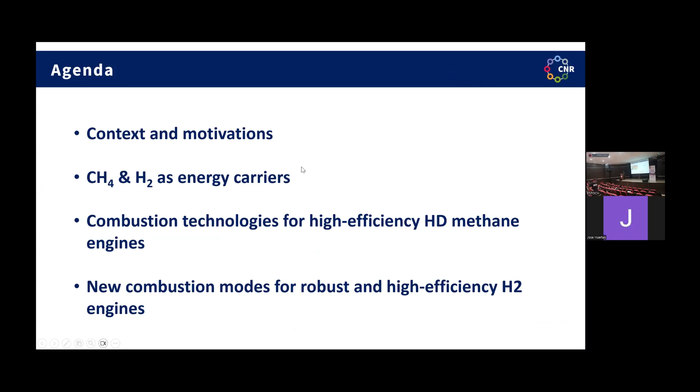This slide is already well known from all the audience, because we need to move in the energy transition to reduce the greenhouse gas emission, and we need to switch from an economy based on use of fossil fuel to a renewable and circular economy in which the energy is totally renewable.

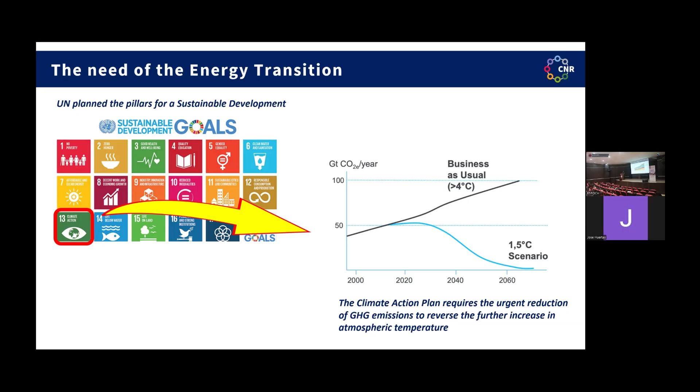In this process, we can see this slide is relative to the Europe situation, but is similar for other countries, that the transport sector accounts for about 20% of greenhouse emission with respect to the total. So this is a not negligible sector in terms of contribution, and that requires attention in improved technology for the energy transition.

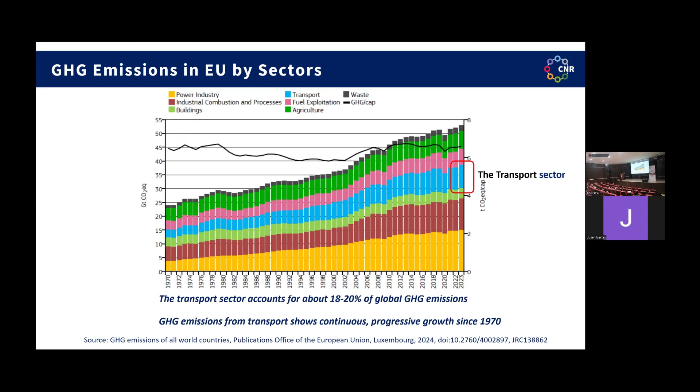Looking to the transport sector, here there is a breakdown of the contribution of different sectors, and you can see that road transportation represents the most important part of the total greenhouse gas emission, in which 60% are for the car, about 27% for heavy-duty truck, and 11% for light-duty vehicle.

But while for cars we are looking to a moderate transition, at least in Europe, toward electrification, battery vehicle, and so on, in the case of heavy-duty truck and light-duty truck, most of the market still remains on diesel and part on natural gas.

Both are fossil sources. But Dr. Chiara Guido already showed this information on the first day of the conference. So we need to work to improve this sector of transport, because it is a so-called hard to abate sector, and this is why, because most of the vehicles are fueled by diesel.

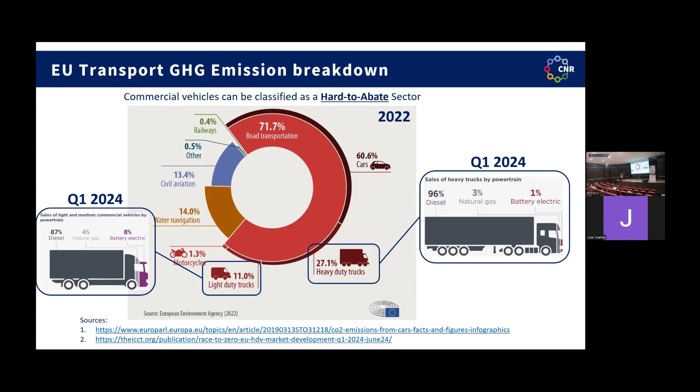What are the solutions? Here we report the conventional technologies that exist in the heavy-duty transport sector: the diesel engine, of course diesel fuel, and part of the market related to CNG and LNG gas. For both these solutions, due to the long history of technology, they have a low total cost of ownership for customer, because the engine cost is cheaper with respect to other solutions, and also the fuel is cheaper. They have a fast refilling time, and of course we know they have a very large infrastructure network for refueling.

The other solutions reported on the right: we have battery electric vehicle, hydrogen internal combustion engine, and hydrogen fuel cell. Each one has pros and cons and uncertainty for the future market.

For example, for battery electric vehicle, that is generally of interest for urban and regional transport, they have a high product cost and a medium total cost of ownership. Slow refilling time, we know the time necessary to recharge the battery, limited refill network at the moment, and limited customer acceptance, which in this sector is the main important driver.

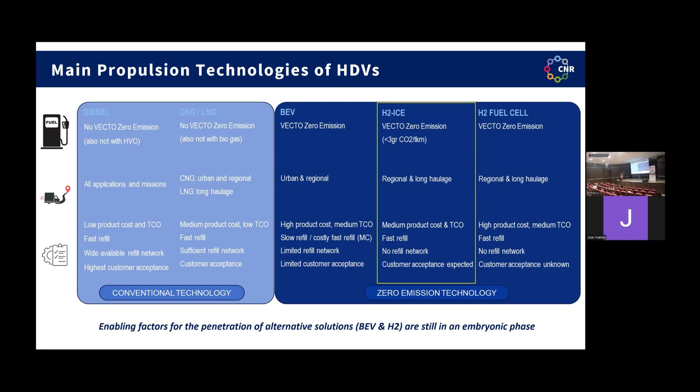For fuel cell, a similar situation. The main difference with the internal combustion engine is high production cost and medium total cost of ownership.

After a brief observation of alternative technology for heavy-duty engines, we ask why we need renewable fuel. A simple explanation is reported here.

Here is a plot of the renewable energy produced in Germany over 24 hours, daily, weekly, and seasonal. You can see there is a very large variation in renewable energy production, so to satisfy energy demand, at least for the next decades, it's necessary to have energy storage for renewable energy systems.

Either electrochemical storage or chemical storage. In this scenario, the production of green hydrogen and at the same time biomethane, so renewable methane, could be two alternative solutions, or part of the solution, to increase the consumption of renewable energy. But what is the situation about the use of hydrogen and renewable methane?

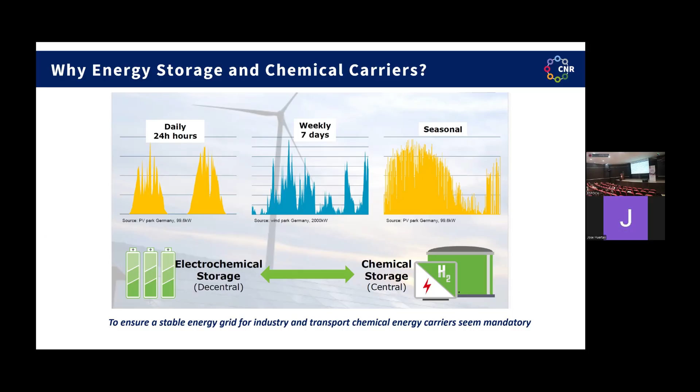About hydrogen, we already discussed the main points for hydrogen internal combustion engines and some benefits with respect to fuel cell or battery electric vehicles. It's possible to have fast refilling, competitive product cost, and at the moment in Europe they are considered zero emission vehicles, because the CO2 produced by hydrogen internal combustion engines is only from lube oil, accounting for about 3 grams per tonne-kilometer of vehicle. Below this limit, vehicles can be considered zero emission CO2.

For methane, it can also be a solution, because when you refill a methane vehicle with biomethane, the vehicle remains at competitive product cost since we already have a supply chain. There is no compromise in terms of driving range, because with LNG you can have mileage similar to diesel. Most importantly, it can use existing infrastructure. It can be mixed with fossil methane, natural gas, without any modification, so it's very fast to introduce into the network, and we already have the capillary infrastructure for distribution.

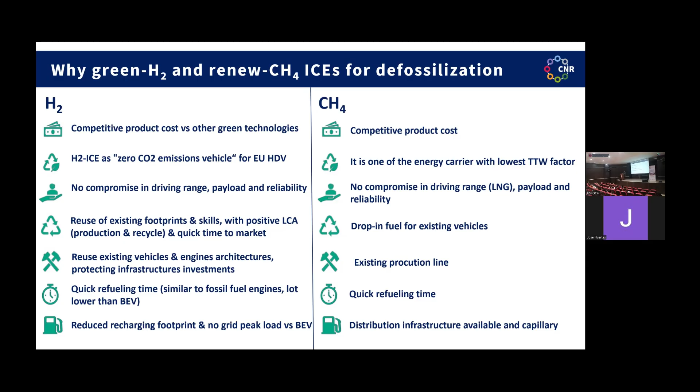This is why interest in developing internal combustion engines and methane engines is still strong, especially from the industrial sector in Europe. But what do we need to do about engines in this scenario?

The most important aspect now is to increase the efficiency of the engine, to reduce fuel consumption when the engine runs, and to reduce pollutant emissions for social acceptance of the engine, possibly to near zero level.

What does near zero mean? It can be discussed, but what I can say is that with the Euro 7 regulation level in Europe, the level of emissions in terms of NOx and PM can be demonstrated to be below the ambient pollutant produced by other sources. This is demonstrated in some cities where for ultra low emission engines, the contribution of a single vehicle to ambient conditions is quite negligible.

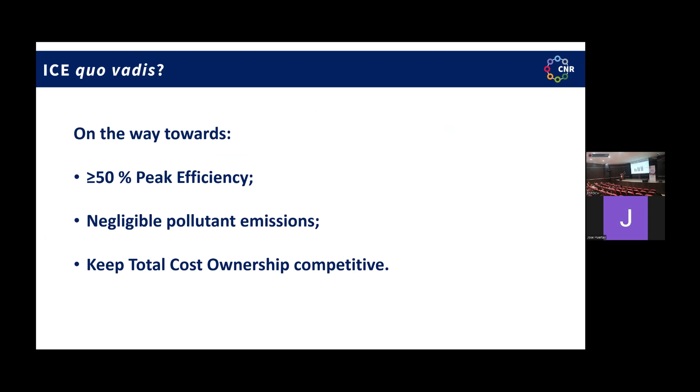provides the response to what was discussed before, regarding hydrogen and why it is the way it is, because at the moment the cost of hydrogen is very high, so it's necessary to reduce the fuel cost to be competitive with diesel.

The difference between hydrogen engine and fuel cell, and which will be successful in the market between these two technologies, will depend on fuel cost, because fuel cell has high efficiency with respect to internal combustion engine, but internal combustion engine has low cost. Depending on what the fuel cost will be, the total cost of ownership of the two vehicles changes between them, so in some cases it could be convenient to buy fuel cell, and in other cases it could be convenient to buy hydrogen internal combustion engine.

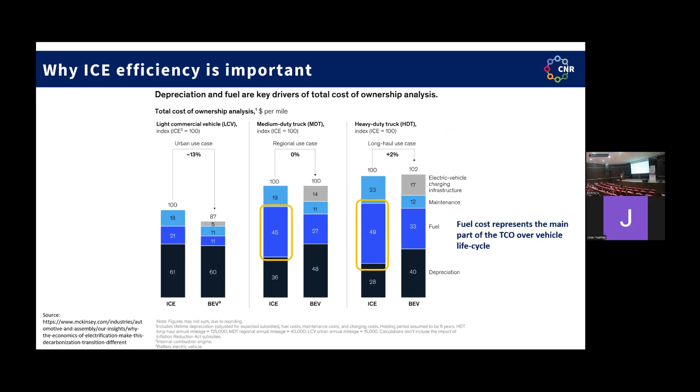This is relative to hydrogen. We are also working on improvement of engine cycle operation control, because when working with hydrogen, especially in ultra-lean conditions, cycle-to-cycle operation becomes an issue. Another important point is optimization of lubrication oil, because dedicated hydrogen use requires a change in formulation to limit the interaction between hydrogen and lube oil molecules.

Another important part is the compatibility of engine component materials with hydrogen, because that is one of the main issues using hydrogen in the engine: embrittlement. The material can reduce its properties in terms of robustness, so it's necessary to use special materials for hydrogen in the engine.

Improvement of an after-treatment system dedicated for hydrogen, and another cutting-edge combustion solution is direct injection compression ignition combustion of hydrogen. I'll show you some results about this point.

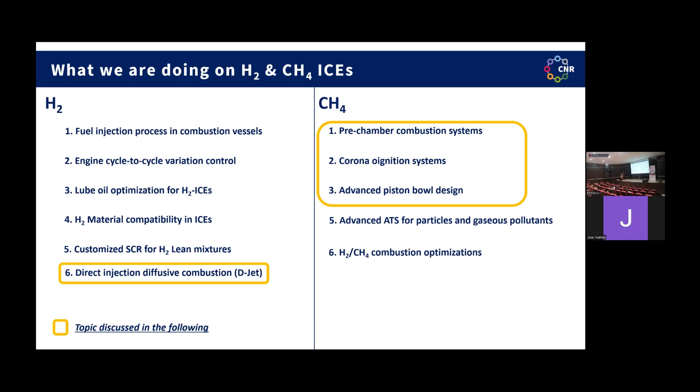A few words about this facility. This is a heavy-duty engine with 2 liters of displacement, and the particular thing is that we designed, developed, and manufactured the entire engine, of course with the support of some customers, but the whole test lab is proprietary to STEMS, our group. The reason is that we want to have a platform with total control of the hardware and software in order to test disruptive technology or new components that would be difficult to test on a complete multi-cylinder engine already prepared by a manufacturer.

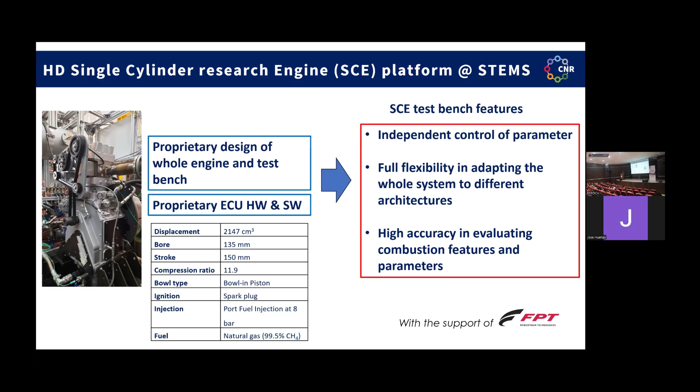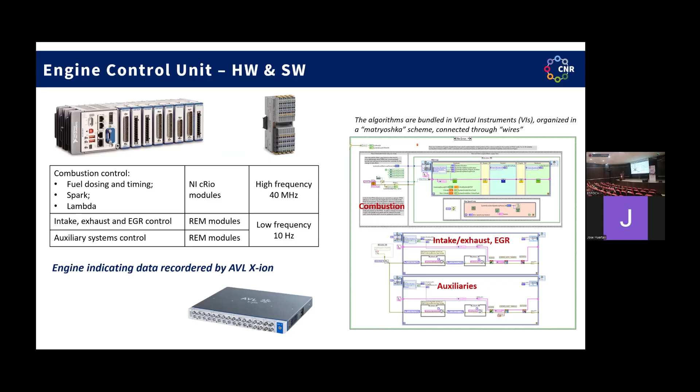Okay, some results, a spotlight on the different technologies that we are working on. The reason why we are working on this is the use of engines with dilute mixture, so leaning the combustion, because leaning the combustion, using a lean air-fuel mixture, increases the efficiency.

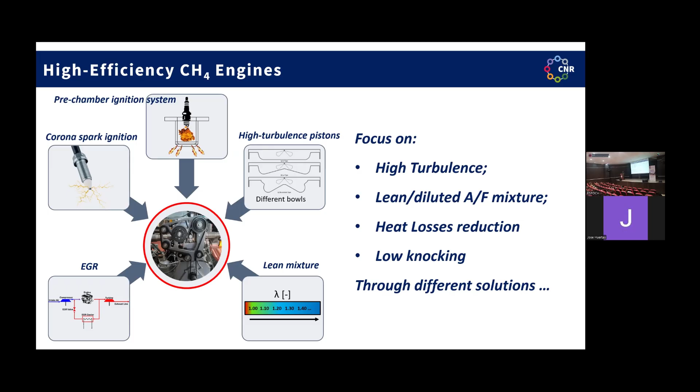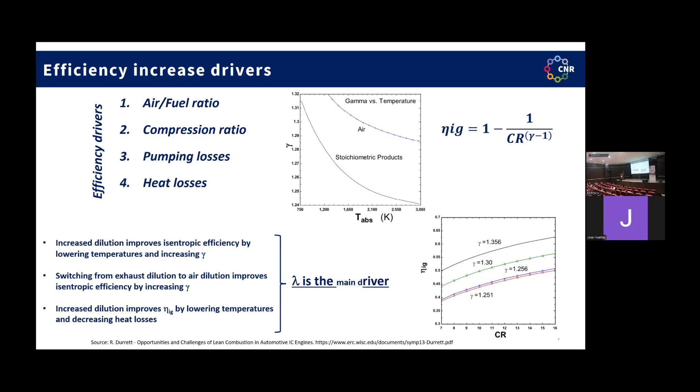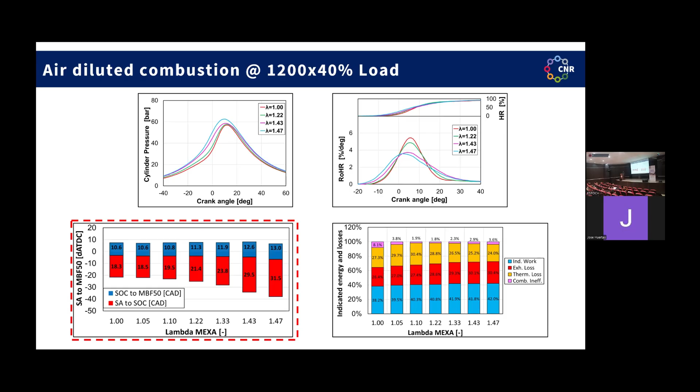The same occurs when instead of air you use EGR, exhaust gas recirculation. You can see that there is an increase of boost, and the duration of combustion increases. This is the crank angle delay between start of spark advance and start of combustion. But in any case, also with EGR, you can see there is a progressive increase of efficiency, less than leaning the mixture with air, but still an increase of efficiency. That's why we are working on the use of these two levers to improve the efficiency of the engine.

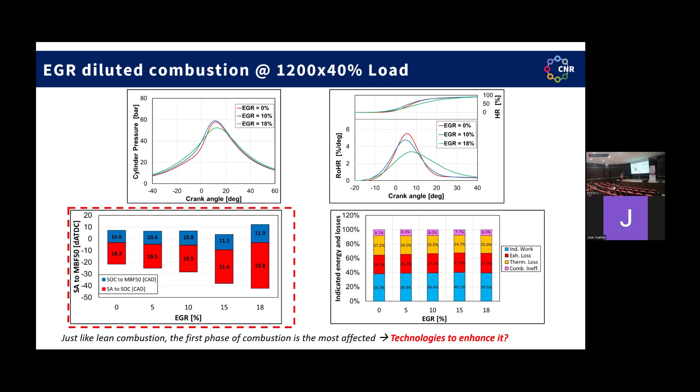Then, how to improve combustion in the lean condition? When you lean the mixture, the two main problems are the ignition of the mixture - you need more energy to ignite it - and controlling the COV variation, to make the engine more stable cycle to cycle. This means in spark ignition engines you need to increase two factors. One is the energy of the spark - more energy introduced into the mixture means faster combustion, so you can dilute the mixture more with air or EGR. The second is improving the flame front velocity, reducing the duration of combustion.

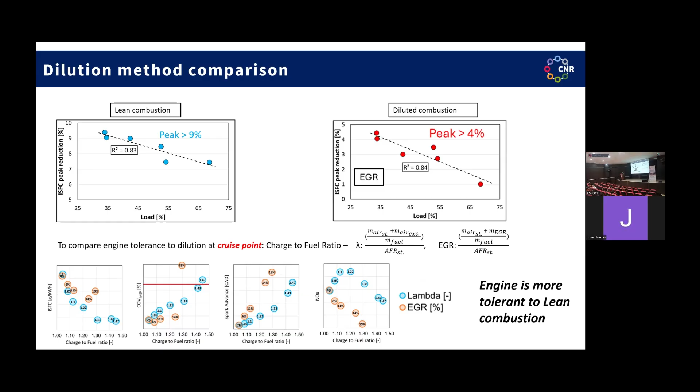This is possible by increasing the turbulence inside the cylinder. By the way, high-speed engines, especially for racing applications, have very high turbulence to increase the velocity of the flame front and burn the fuel as fast as possible. The increase of energy produced in the cylinder is currently being worked on with two solutions: one is the corona igniter, another is the pre-chamber system, while turbulence is improved by redesign of the piston bowls.

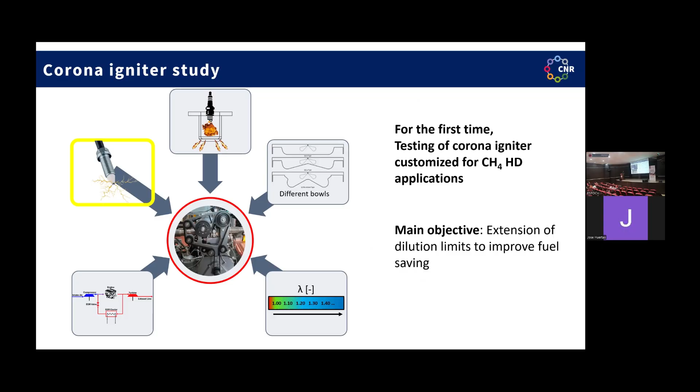About the corona spark ignition system, if someone doesn't know how it works, you can see here the two effects of the conventional spark plug versus the corona ignition. The corona ignition practically generates a plasma of electrons inside the mixture. Some plasma sparks are named streamers, and it is a non-equilibrium, low-temperature plasma, in the sense that electrons are energized inside the mixture, but the temperature of the volume doesn't change much. This is different from the conventional spark. Another important aspect is that the volume of mixture in which electrons are energized is much larger than with a conventional spark. You can see here a movie taken with our phone close to our engine.

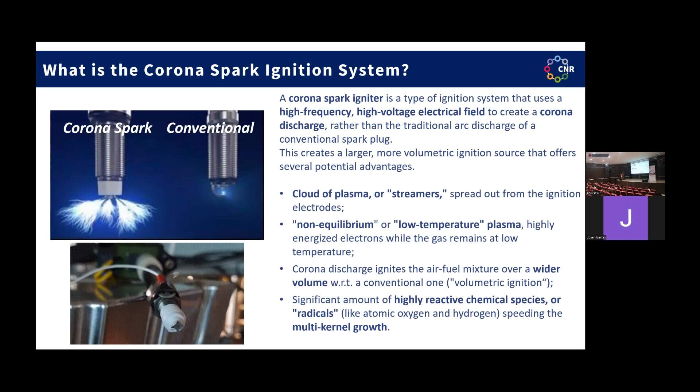What are the effects of corona ignition? The effects are reported here. Practically, when you switch from spark plug to corona, there is an increase in spark velocity, or combustion velocity. This is the spark timing of the conventional plug, and this is the spark timing of the corona ignition. You can see that at the same cylinder pressure, it can be retarded, reducing also the classical problem of spark ignition combustion in terms of knocking.

However, when you move to lean condition, at the moment there is not the same performance as the spark plug, because the cylinder pressure is a little bit lower. But this is why it is also retarded. So these two tests are collected at the same phasing of the center of combustion.

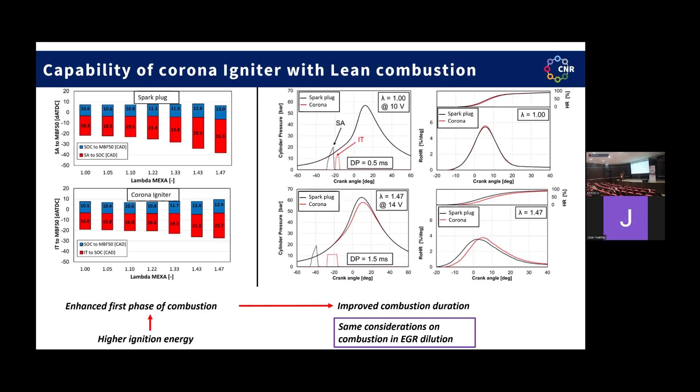When you look at the results in terms of specific fuel consumption and COV, there is a slight benefit at the moment for this type of engine - methane heavy duty - when you move from spark plug to corona ignition. This is a bit different from experience on high-speed gasoline engines, because generally when you apply corona in a high-speed engine there is an improvement of performance. In this case, for a low speed heavy duty gas engine, we don't see at the moment a very strong improvement, but we are working on this to evaluate the limit to better exploit this technology, which again, in high-speed engines, demonstrates great potential to improve combustion velocity.

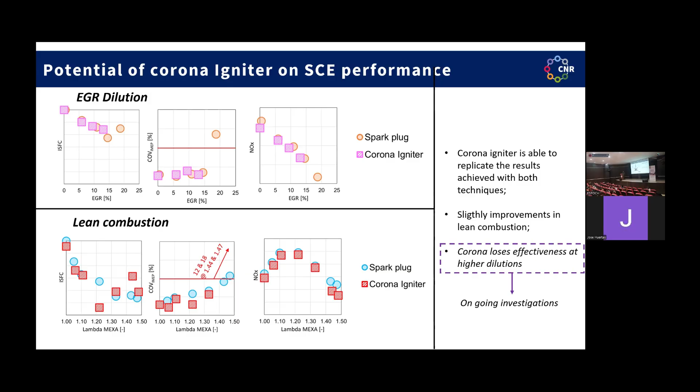Another technology already named, called by Hans, by Professor Behmen before, is the pre-chamber system. What is the pre-chamber system? Practically, instead of having the spark plug inside the cylinder, you have a cap, a small volume in which the spark plug is put.

There are two versions. One, there is only the spark plug - this is named the passive pre-chamber, in which the fuel-air mixture arrives from the combustion chamber inside the volume. The second version is the active pre-chamber, in which there are both a fuel injector and spark plug, and you can control the fuel mixing inside the pre-chamber, which can be different from the fuel mixture inside the main chamber of the piston.

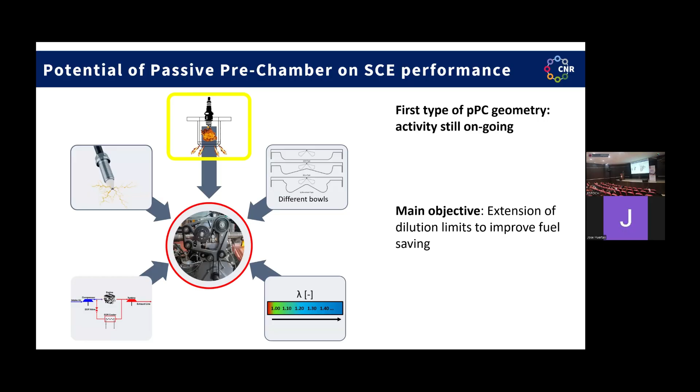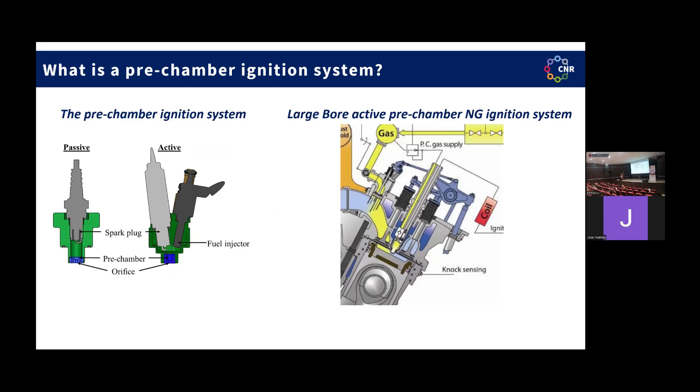But we have a strictly limited operative window in which these two results can be obtained, because for ultra-lean condition - though it depends on the fuel, this is for methane - misfiring occurs. Otherwise, for richer conditions, you have a problem of knocking when you arrive too high in terms of load.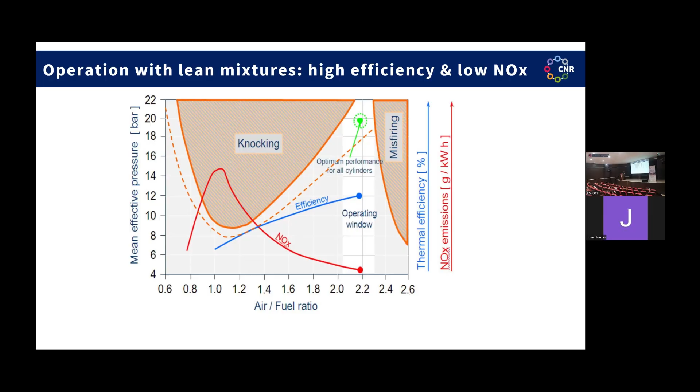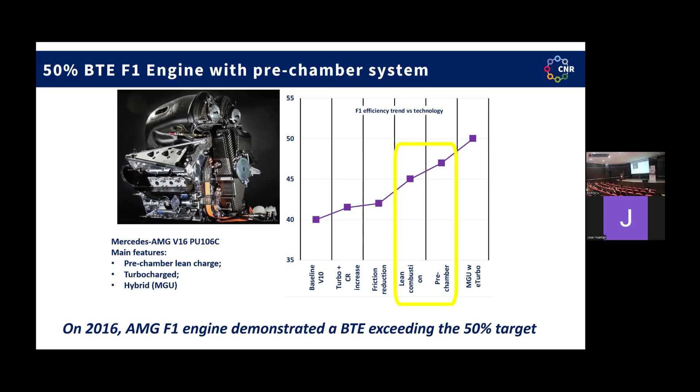So apart from this spotlight, what are the results in our heavy-duty methane engine? Pre-chamber increases the combustion in the first phase, increasing the speed of combustion, the release of energy in the first phase of combustion.

You can see here that with stoichiometric condition, the spark timing can be retarded with respect to the normal spark plug using the passive pre-chamber. And again, when you go into a lean condition, there is a reduction of the combustion speed with the pre-chamber.

About the duration, you can see that with the conventional spark plug, leaning the mixture progressively increases the duration of combustion. But when you switch to the passive pre-chamber, from stoichiometric to ultra-lean condition, the duration of combustion increases more than with the conventional spark plug.

Notwithstanding that, in stoichiometric condition we have a benefit, because this is 18 crank angle, and here we have about 15 crank angle, demonstrating the shortening of combustion. This occurs because with the pre-chamber, the transmission of combustion from the pre-chamber to the main chamber through the pre-chamber hole is a very complex process, and the scavenging - the formation of mixture inside the passive pre-chamber - is strongly dependent on boundary conditions. We are now working on this to improve the design of the passive pre-chamber.

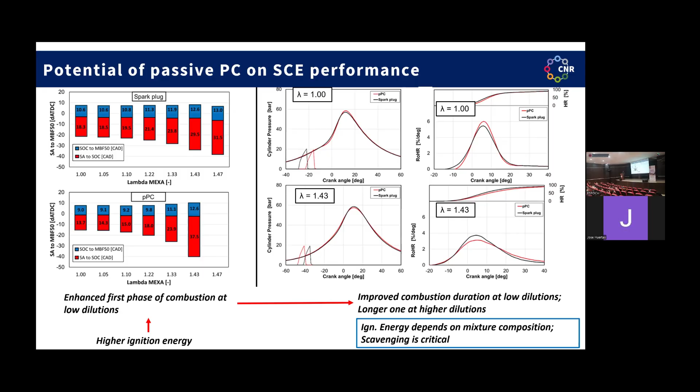To transfer the benefit observed at stoichiometric condition also to lean condition. Finally, for methane, some notes about what is necessary to improve the piston design, because piston design generally controls the turbulence inside the engine. This is mainly valid for low-speed engines.

These are some sketches of the different piston shapes that we are studying.

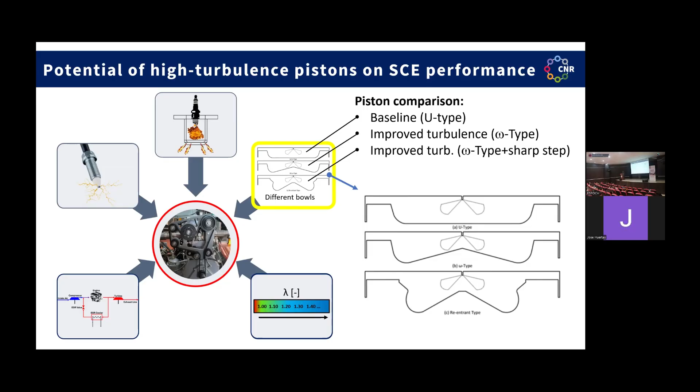As a result of the potential of this leverage to improve efficiency, these are the traces of two different piston designs at the same engine condition. You can see that one has increased turbulence. When turbulence increases, the combustion speed also increases and the cylinder pressure increases. You can see here the difference in heat release rate, reducing fuel consumption.

Generally, we also measured a possible reduction of up to 2%, just by changing the combustion piston body.

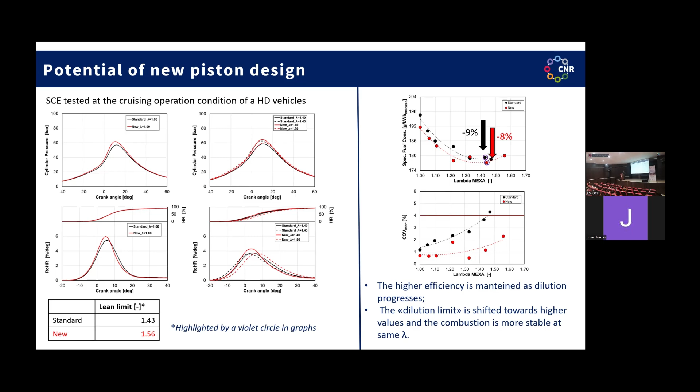Some spots about hydrogen experience. These experiences are carried out in cooperation with FKFS, the Department of Engineering Automotive in Stuttgart.

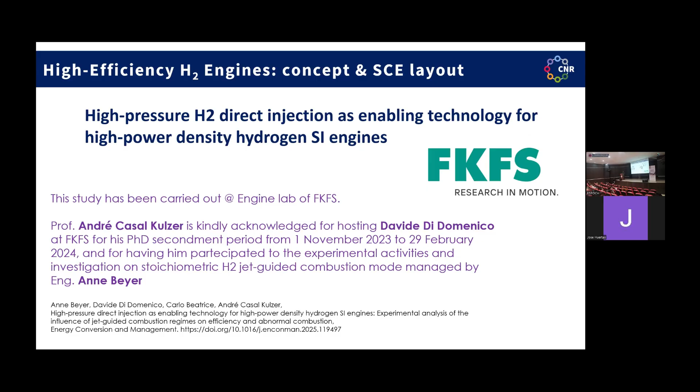What we did was try to control the combustion of hydrogen not with total premixed fuel, but by injecting the hydrogen around top dead center at high pressure, like diesel, and sparking the mixture across the injection duration.

You can see the sketch here. This is top dead center. The injection duration was facing around top dead center, and the spark was activated within this time frame, for different steps shown here: 20, 40, 60, up to 120.

This is a delay of time with respect to start of injection. For 100 and 120, you spark the mixture at the end of combustion, at the end of injection. This means you have a premixed mixture inside the cylinder, but not homogeneous—totally stratified, because the hydrogen is progressively distributed in the cylinder.

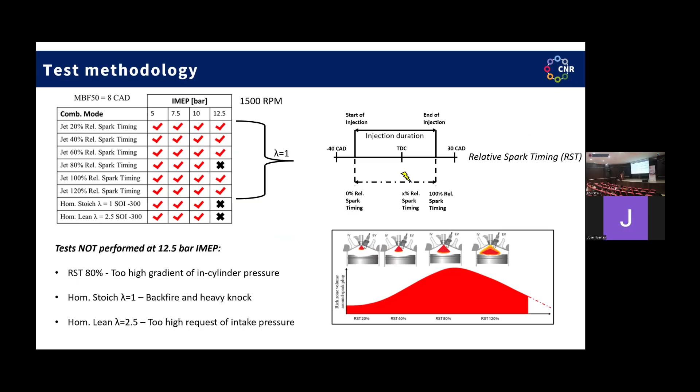It's very interesting results, because when you spark at the end of injection, you have a classical premixed combustion, so the whole mixture burns very fast, even though it's all stratified in the engine, so it's not homogeneous, but it still burns very fast.

When you move the spark from the end to the beginning of the injection, the shape becomes like a diesel combustion, with a premixed phase and a diffusive stage. This means that the part of the hydrogen injected before the spark burns immediately, independent of timing, and the rest burns like a diesel combustion.

This is very interesting because the combustion duration increases as the spark is advanced towards the start of injection. The indicated efficiency increases with load, but decreases when you move from a totally premixed combustion to a diffusive combustion. But this reduces the problems of the hydrogen engine, because you avoid auto-ignition and you reduce NOx formation, as you can see later.

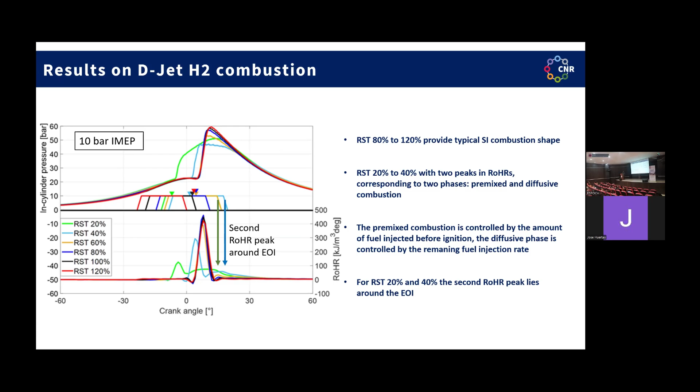Another very interesting result is that for all spark settings, the duration of the premixed phase is always the same. This means that whatever quantity of hydrogen is injected before the spark burns immediately, because hydrogen combustion is very, very fast.

Just to finish, another very interesting result is that when you move from highly premixed combustion to diffusive combustion, the NOx tends to reduce.

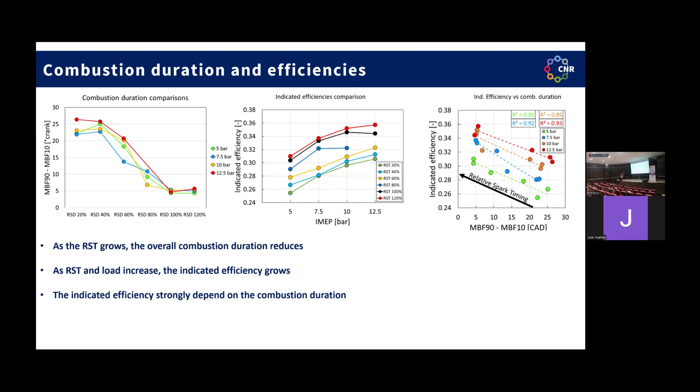One main comment on these results: the capability to implement this technology permits transforming a conventional stoichiometric spark ignition hydrogen engine into a diesel-like engine, in which the efficiency becomes controlled by the quantity of hydrogen put inside the cylinder, depending on the velocity at which the hydrogen is delivered inside the cylinder. If high-pressure injection hydrogen engine technology improves, it's possible to reach the efficiency of a diesel engine using only hydrogen.

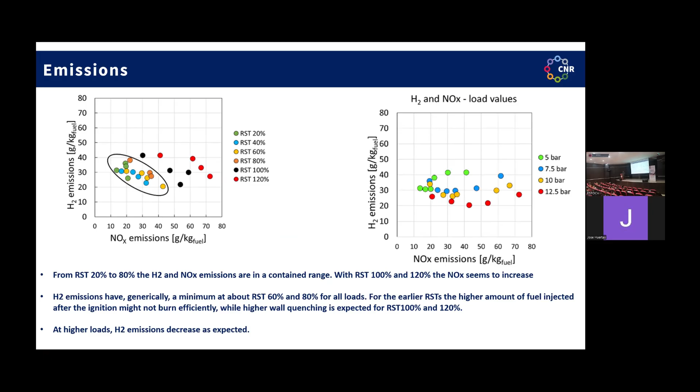And this would be a very, very great result. Okay, sorry if I went a bit late, I'll close with just the main keynote for this.

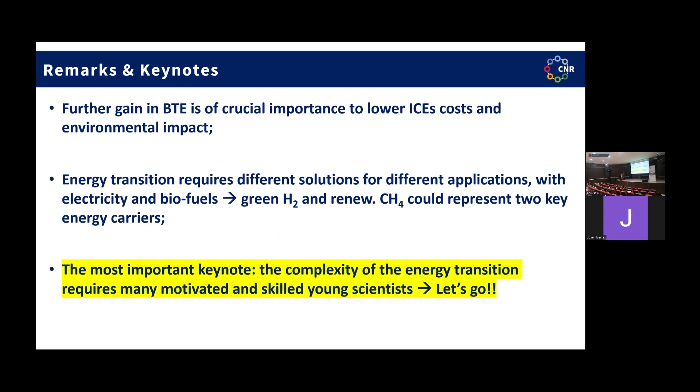The complexity of the energy transition requires many motivated and skilled young scientists, because it's a very complex problem. For the young people here, I hope this presentation and these talks will stimulate your passion and interest in this complex problem of energy transition.